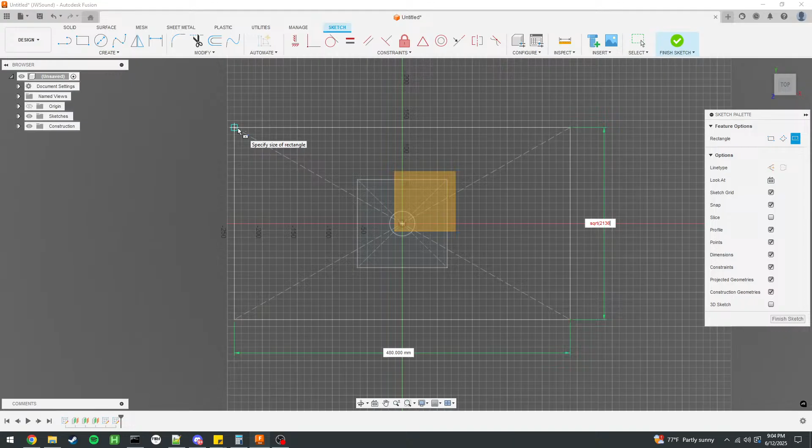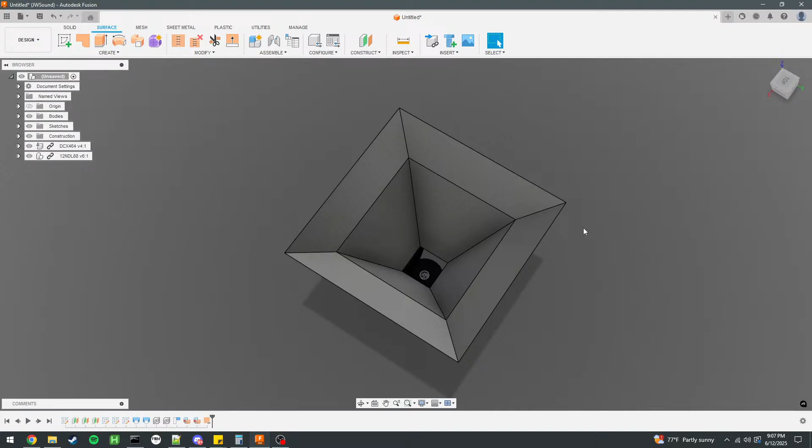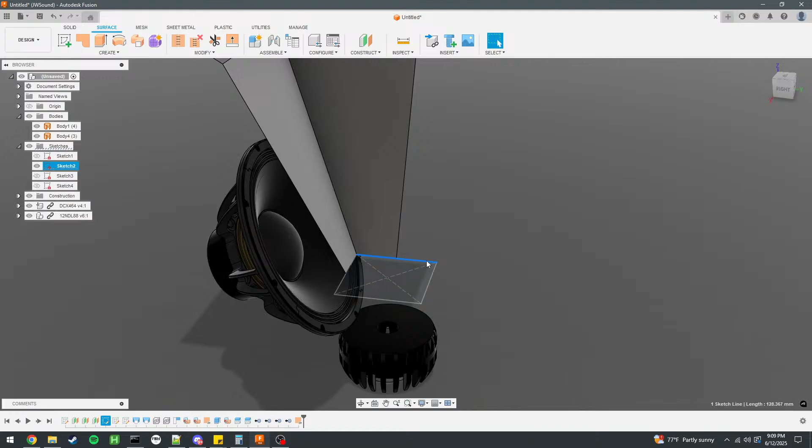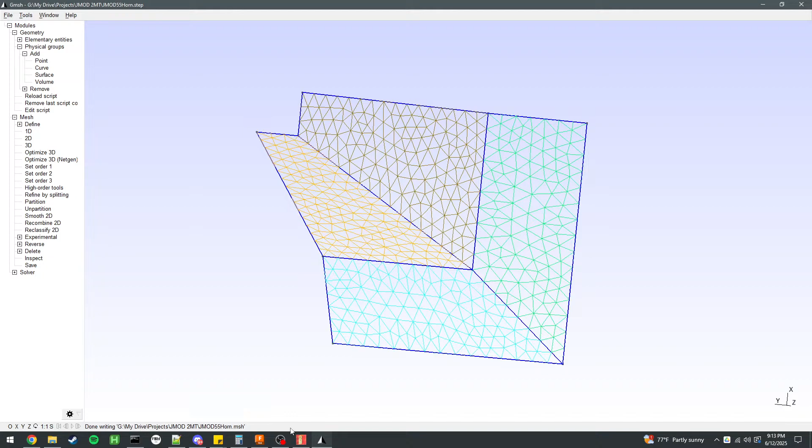Okay. Whoops, forgot this part. Where is it? There it is. There we go.

One note about this, I don't bother labeling surface groups anymore, just because it's a pain to do in Gmsh. So I normally just export all the meshes I need without actually labeling anything. I just label them as separate mesh files in here. And the next one.

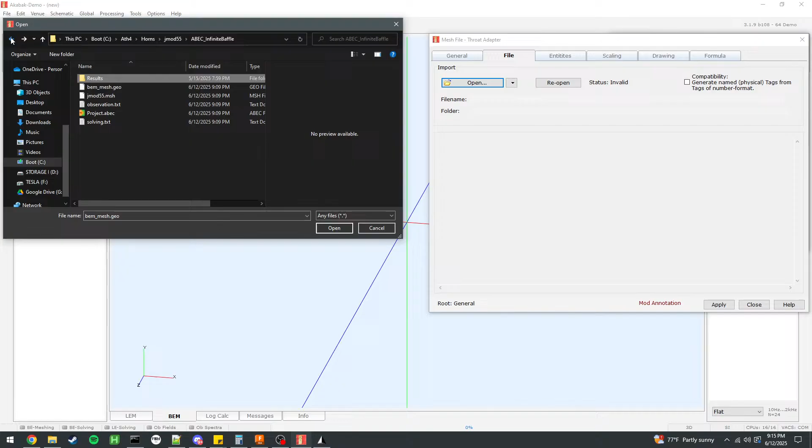Wait, there we go. Let's see. Need to add the throat adapter, which is in the ath folder. I think it's this one. Yeah. Okay, so we need the compression driver and horn type piece. Yep. And close.

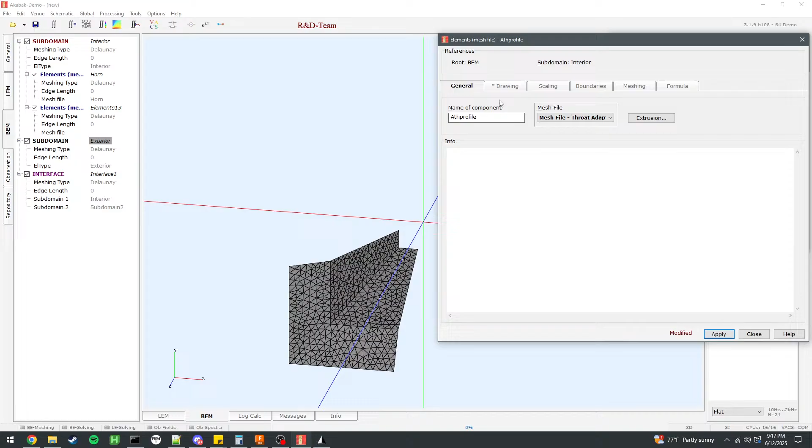Interior, exterior, and interface. I think that's it. Oops. There we go. Add the horn mesh onto this one. Yep. And yeah, the ath piece. Just call it throat adapter. Whoops. Nope, that's not right. Oh well.

Oh, oops. Get the scaling wrong. I guess it just needs to be that. Yeah, okay. And then rotate it. And not so long. The Z-axis, maybe? Yes, just 180. There we go. Nice.

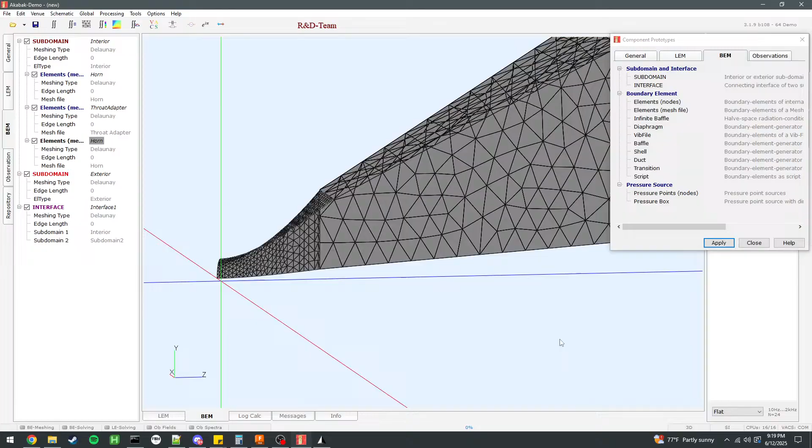And now the compression driver. I'm not going to use the full model of the DCX 464 just yet because that does add sim time. And I just want to get like a rough model in it first. And make sure that's driven. Perfect. Okay. Now we need the interface.

Wait, is that tiny again? Yes. Gotta fix the scaling. And need to rotate that 180. There we go. Now we'll actually set up the solving. And I don't expect this profile to work at all, but I do want to make sure that we get the model set up at least.

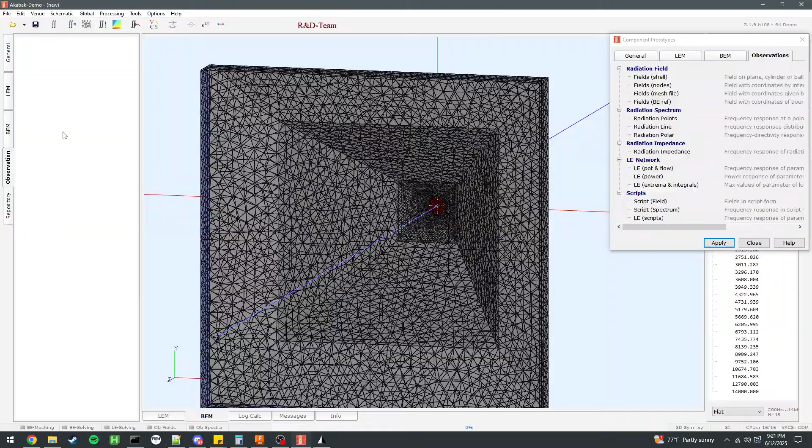All right, and now we'll set up the actual observations for what we're measuring. And this actually needs to be offset for the length of the horn, which is, what's that distance? 486 millimeters. So we go to position. That didn't do it. And neither did that. Okay, that's fine.

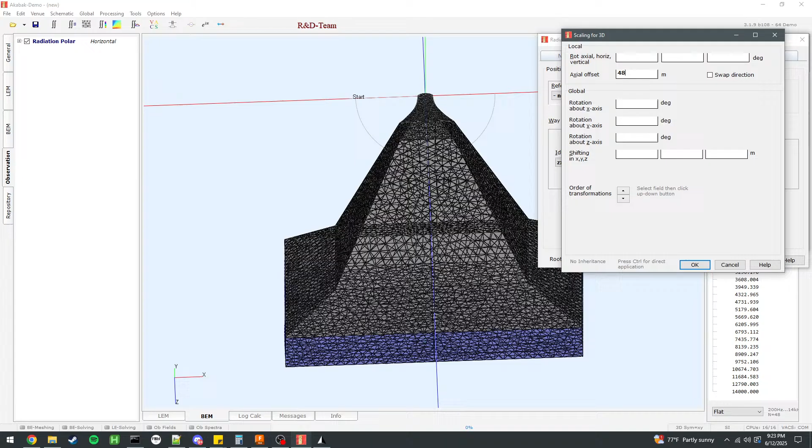Hmm. Okay, that's where it needs to be, but I need this arc to be further out. Oh, okay, it's units again, I guess. That's fine. All right, that looks all good. Yep, and close and duplicate that for the vertical. Actually, I just realized this is symmetrical. The vertical won't tell us anything different. Let's set up a 45. That might be helpful.

So I guess need to rotate like this. Yeah, okay. Yep. And let's see, fixed driving enabled. I think that's it. I always wonder if I have this set up right. Nope, forgot the infinite baffle. I can't remember if that's supposed to be interior or exterior, but we'll figure it out.

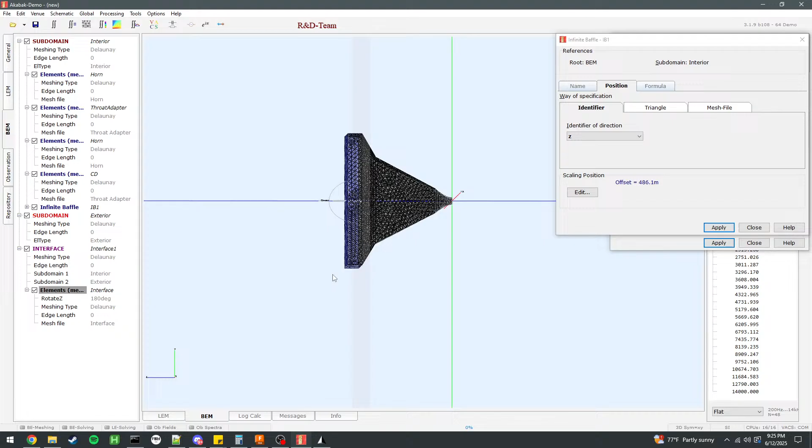Needs to be like that. And then needs to come out 486.1. There we go. Now the horn is in the wall. I think that's it. Let's see what happens. All right. And while that churns, I'm going to flip back over to here. Main goal tonight is not to get this finalized or anything, but just get the model set up. Oh, that's new. Huh. I've never seen that peak before. Guess I'll find out what that means.

But yeah, to get a kind of sort of somewhat parametric model for the setup, check fitment of things, just kind of start on the general layout of how this build's going to go together. So we'll actually start modeling the horn a bit, and then we can always come back to this point in the timeline to get what we need out of it if we need to regenerate those meshes. Let's see. So I guess the first thing is figuring out how the trapezoid part's going to work and what angle that needs to be at.

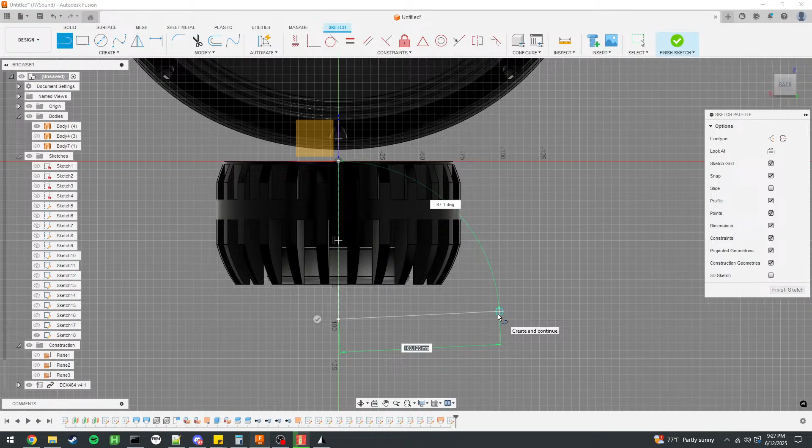I'm going to actually look at it like this. So let's get the back of the cabinet. That's 80. Yeah, probably like 100's fine for clearance to the compression driver. And then the next important part is figuring out how far that needs to extend. So that's 112.6. I think what we need it to be is that. Yeah, I might have to think about that a little more. Well, let's see if this is, yeah, because I want to make sure there's room for the compression driver in the back.

So that's the thing that I'm wondering here: if I can't get that angle exactly 55 degrees, what does it really need to be? Because in theory, you want a bit of overlap between the two, but not too much. Because you can either have an instance where the patterns of the two speakers that are going to be coupled together will destructively cause comb filtering, or you're just going to end up with a null in the middle.

So we kind of want to ride right between that line. And the directivity is supposed to be 55 degrees. So we have to figure out, does this need to be 57 degrees? Does it need to be 52 degrees or any variation like that? My gut kind of says it needs to be a little bit closer in, but that's why we're doing

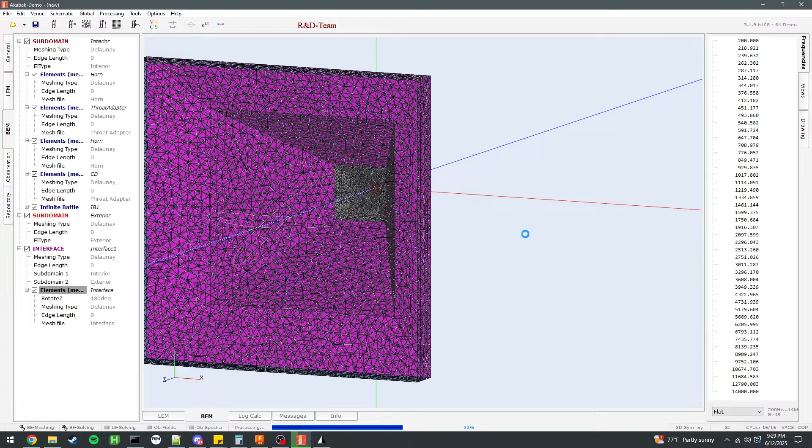this part. So really what I would like to do is figure out a way to get this model set up with two cabinets. I wanted to get at least one good sim result first, but the idea is we can actually set two up at an angle and then slowly adjust that angle between them and use both driving elements to figure out what that pattern looks like in theory. I've not done this yet in Akabak, so it may or may not work.

The pink mesh is very interesting though. Let me see what I did in the draft one. There we go. So with this one, that's 109.6. So that's 19.6 times 2. Let's see here. Yeah, that's something like that, which might be fine.

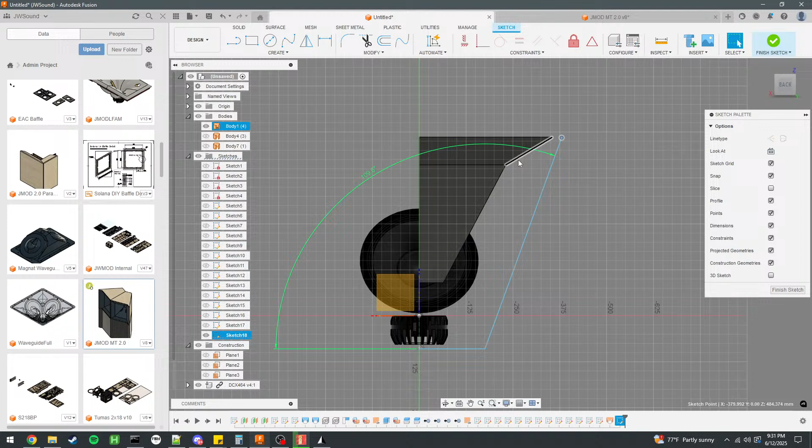I guess one variable I have to tweak here is the length of that secondary flare piece, because if you think about driver access and how this has all got to fit together, if I move that in or out, I can move the outside edge of that cabinet and adjust the angle pretty easily while still having room to access drivers. So I might actually have to move it in considerably. Again, it kind of depends on how this shakes out here.

Because really I'm trying to figure out what the angle of the outside edge of the cabinet should be, and then that'll drive a lot of decisions around how I'm going to fit the drivers in there, which I don't feel like is going to be a challenge. These are like 28-inch or 700 millimeter wide mounts, and using the 12s in there, I can push them up if I need to, but there should be plenty of room inside this cabinet. There you go. Okay.

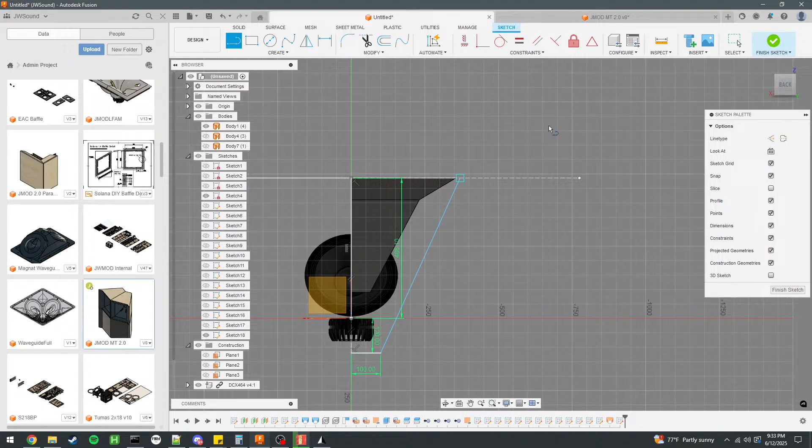Yeah, so I'm just going to roughly sketch this out and know that I'll come back and change that to what it needs to be later. So that's 711. We'll go and set that, then add. I guess half inch. That's another thing. This cabinet's a little bit larger, so it might make more sense to use 18 millimeter plywood throughout, but I kind of want to see what it looks like with half inch.

All right, and oops. No, I need you to go there. There you go. Okay. Yeah, like that. Okay, this is not filled in because of that. There we go. Yeah, in theory, this all kind of fits together.

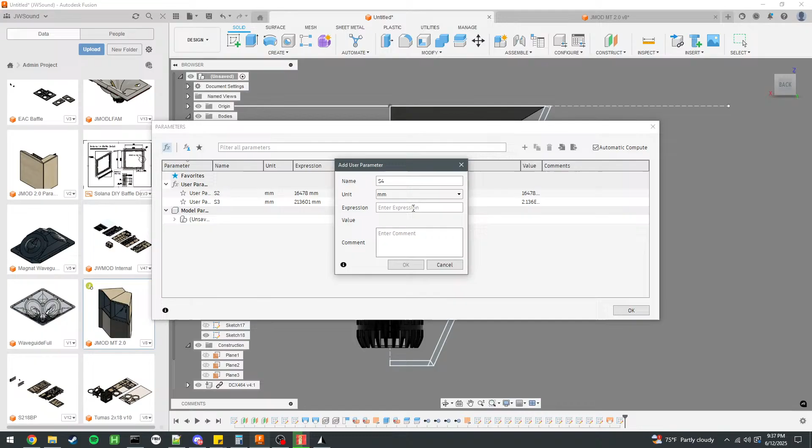So we'll do the S2 from Hornresp, and that needs to be 16478. S3. And S4. All right, so I did that so that I can go into the actual sketches here and replace these values. Oh, shoot. That's not right. Okay, why don't you like this? Maybe I need to actually remove the units. Oh, yeah, of course that works.

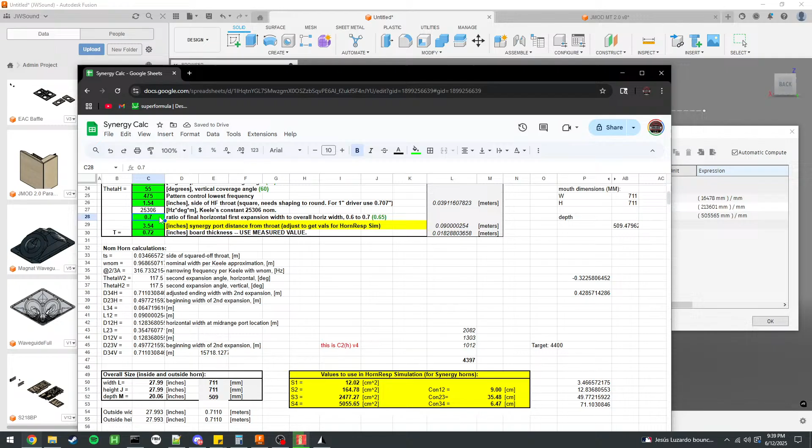Yep, and the sketch. Cool. So what that allows me to do now is if I need to change the angle of this outer wall, which I definitely will, all I have to do is flip back over to the Synergy Calc spreadsheet, which I'm still working on automating, and then change, I believe, this value, maybe? No, that's not right. Might actually be better to just eyeball it. So instead of 55, I go like 45. Yeah, okay, cool. So that's doing the thing.

And this is something where I can go into Akabak and actually simulate what that does, just like I did with version 2 of the wide variant. But yeah, that looks like it should. I do want to make it so the sketch actually moves too. That math is it this? Yeah, it's that. Okay, sick. So now I change this value. Perfect. Cool.

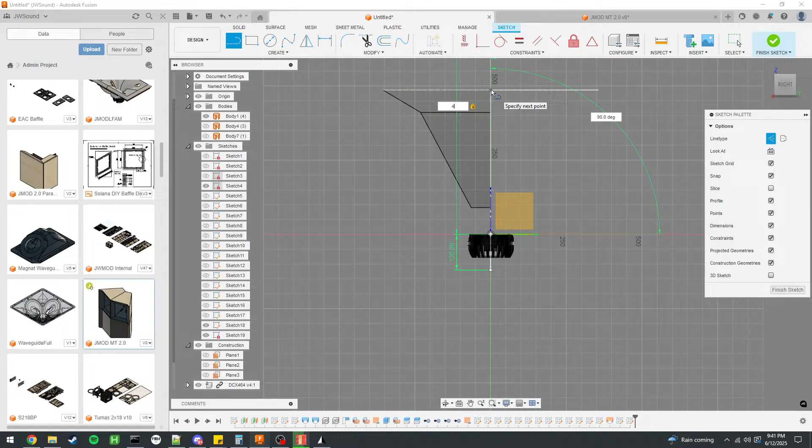Okay. Now I think I want to do this axis, which is going to be a lot easier because all we have to do is do that. Wait, I think I messed up. All right, just need to think about how this is set up. I guess that's right.

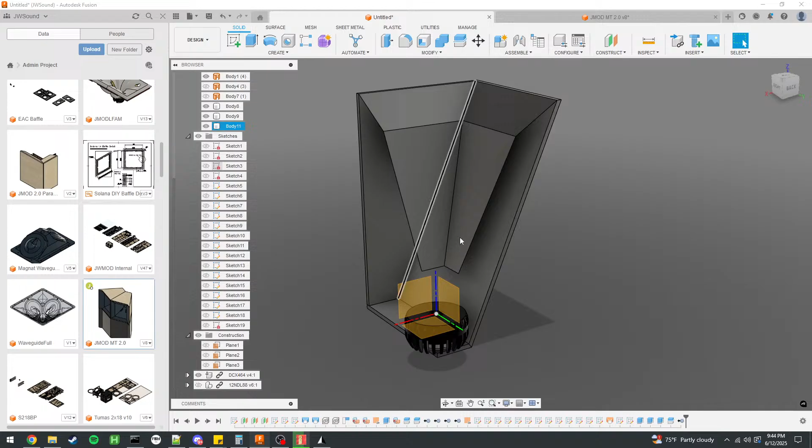Okay. What next? Driver's fit. Yeah, that's like perfect. There's like a lot of extra volume in here. It's like, could I fit 15s? Probably. It's a bit excessive though. Have to think about that. Anyways, as far as getting this in here, that can go like that. That can go like that, I think. Yeah, yep, okay.

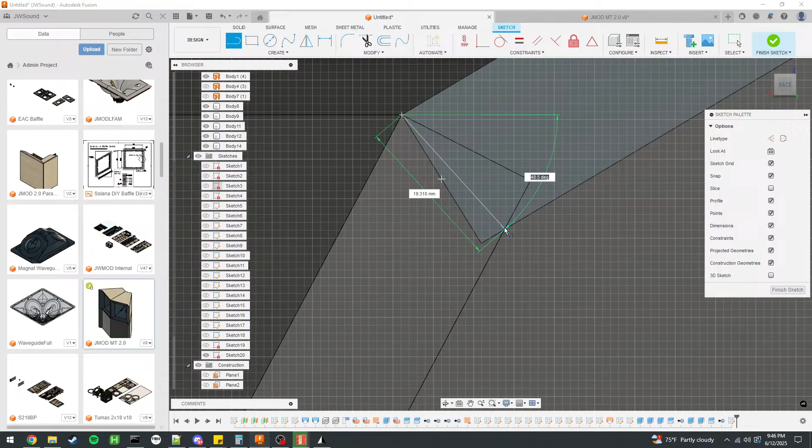I think what we need to do here, oh wait, that's gonna be tricky. I think the easy way to do this is first split it, remove that. That's gonna be a really tricky angle to cut. Maybe not terrible. Yeah, 34 isn't crazy on a table saw. It's just annoying. And then for that bottom part there, trying to think what that angle would actually be. So that's 18.3.

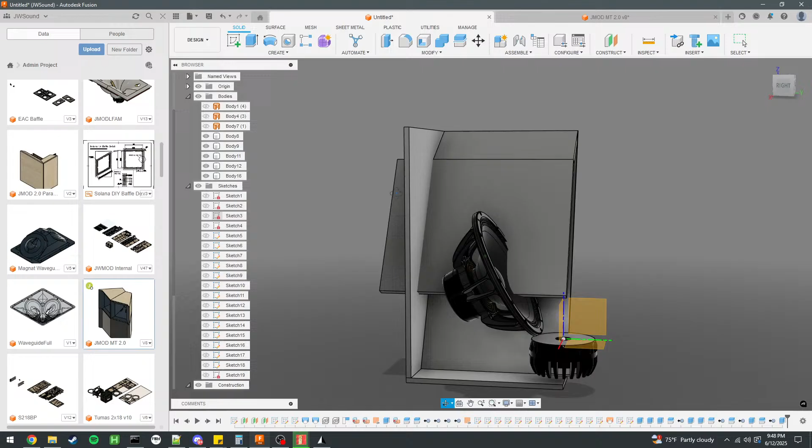I'd rather write a formula in here for figuring out what that angle is rather than just sticking a value in there. Actually, it may not matter. Yeah, I can just do this. And then you go away. And then cool. I think same for this one. Oops, there we go. Oh, wait. I totally put that on the wrong flare. Whoops. Yeah, okay. All these steps need to go away. Okay, that's fine. You come out 18. You come out 18.

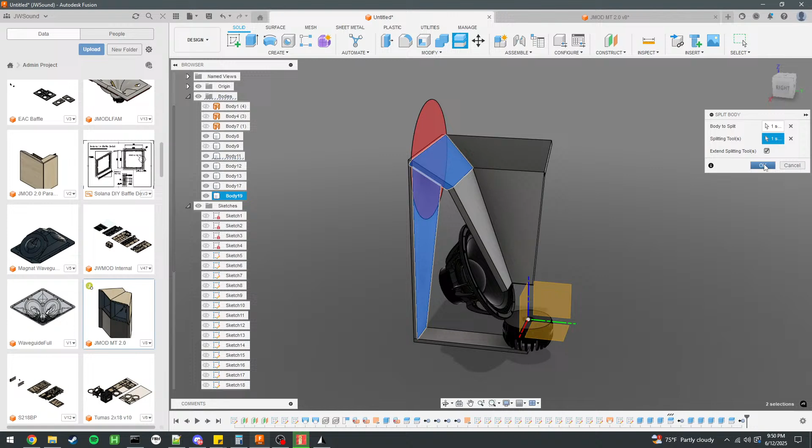There we go. What we want for these panels is for them to extend out to here, so that they're basically supported by the exterior walls. I'm pretty sure this doesn't work. No. Okay. So repeat what we did earlier. Move that and split that one. Yep.

Yeah, I use millimeters because it was just easier to switch over. I tried to work in inches, but most of the people who use my design are not in the US, so I just figured it was easier to switch.

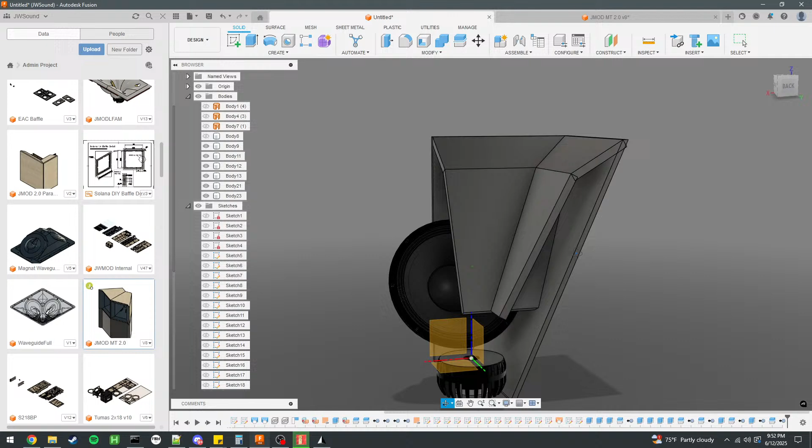Okay, so got this now. We want to extend these out like so. And same for this one. Wait. Okay. I mean, I did that wrong, but I guess it doesn't matter. Okay, split this like that and remove. Cool. So this part's a little bit tricky. I can already tell. Maybe not. It's just getting these pockets cut here.

So because this panel kind of intersects at an angle here, it's not 90. It's more like 10.8 degrees, or sorry, 79. It could make things a little bit tricky for assembly. I mean, I can just cut that pocket bigger on the CNC, but since that's not a perfect 90, I'm just gonna have to see how all this is gonna fit together to make sure that's actually doable. Wait, would it be a perfect 90? No, I don't think so. Okay, well, that's fine.

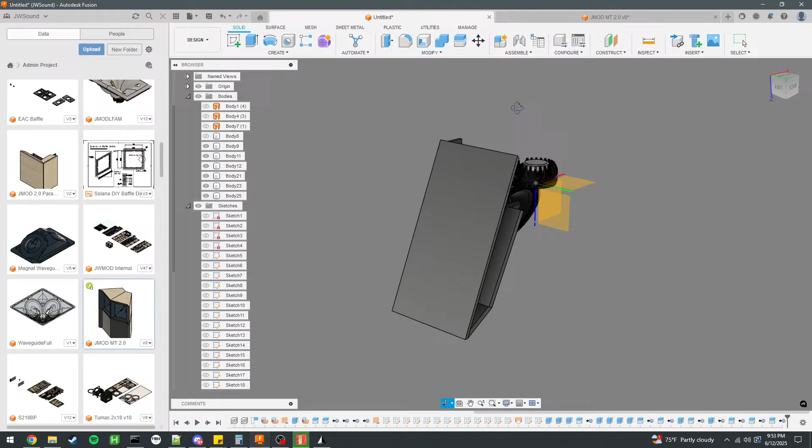Okay, so this panel looks good. Do actually need to split it up here. Cool. Yeah, that's looking actually pretty decent, I feel like. I want to rough out where the ports are going to be. So to do that, it's easiest to make a circle that's going to be your quarter wavelength. And I'm hopeless because I always use this calculator. So we know it's going to have to be 500 hertz, 686. Divide that by 4. Whoa, is that right? That feels really close. Hang on.

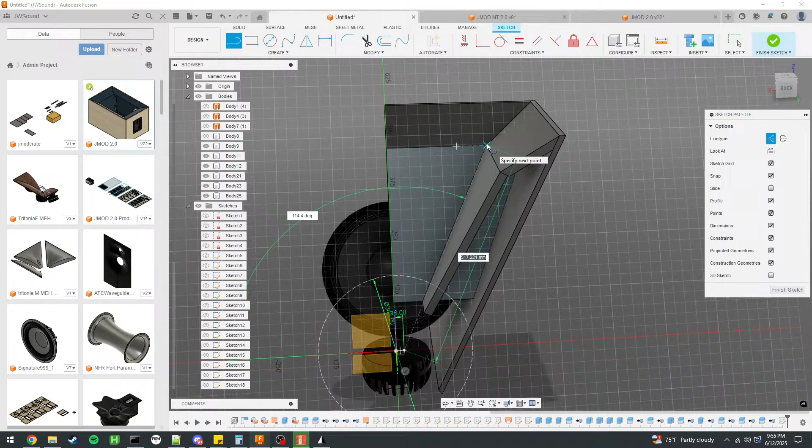You actually see what I did in here. Okay, so for this design, I used a circle with a radius of 343. Oh, yeah, because that's radius, not diameter. Okay, so back to here. That needs to be that. Okay, cool. That's where the center of the ports need to be, roughly. Usually it's easiest to just come out here. Actually, that needs to be that. Sure, we'll put it there. And then whatever the actual port area for this was is probably what I need to reuse, which is just roughly 3813. So that's kind of my target.

Actually, I did something different on these, didn't I? It may actually be way, way easier just to copy this whole sketch, because the actual acoustic crossovers aren't going to be anything different with this. There we go.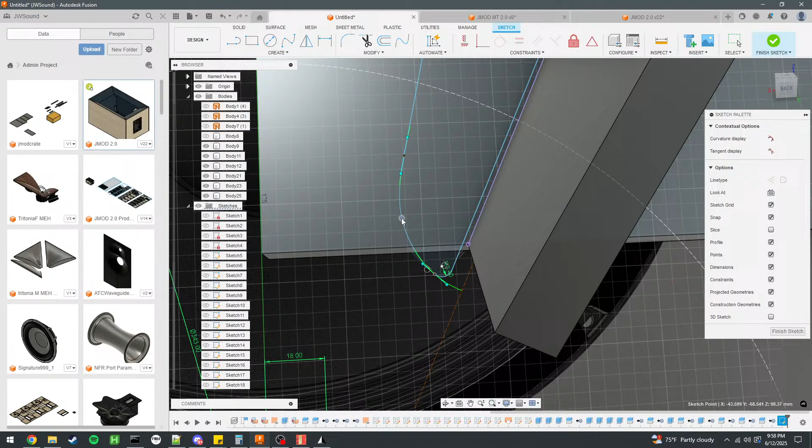Yeah, there we go. Actually, given where that line is, where the throat adapter terminates, I'm kind of wondering if I even need to do this kind of extension part into the actual throat adapter or not. Of course, I think the logic there is I wanted to get the ports in as close as possible for maximum summation. So

it's a little bit of a balancing act because with the wide coverage top, you have a lot faster of a flare rate. So by the time the wavefront gets to the taps, they're a relatively small part of the horn. Whereas with this one being a 55 by 55 coverage pattern, the horn is going to have much less of a flare rate, meaning the taps are going to take up more space.

So as long as the middle of them is roughly where that line is, we should get ideal summation. So I probably can push them out a bit to prevent any interruptions to the compression driver wavefront, or mitigate that somewhat. So maybe something like this. But at that point, the middle of the port's well outside a quarter wavelength, and we're more like,

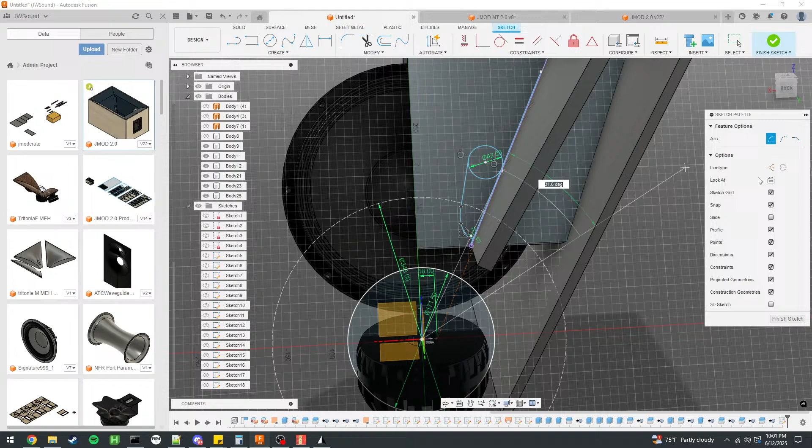actually, there's an easier way to do this. Okay, that's kind of like the third wavelength, which some people are saying is okay, which it should be. It still puts the sources in the summation range, but yeah, maybe it's worth a shot trying. I'm just gonna leave it right there for now and see how it looks.

And then the surface area, our target was, hang on, I forgot the number. Need roughly 3,800. I'm gonna write that down. Okay, so we're at 3,500, so we can actually go a bit smaller. I think I'm gonna make this a little bit smaller then.

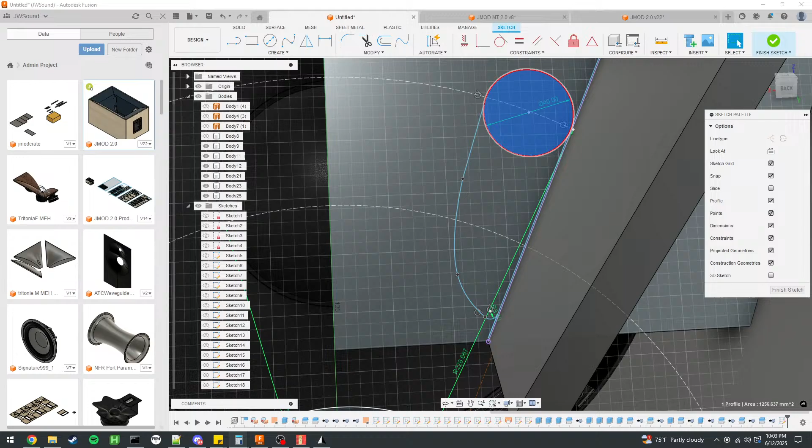We should try 40. Okay, that's 1256 and 2287, 3500, just a little bit more. I could bring it down a little bit closer to this edge. I don't want to bring it too close, because if I bring it closer than 5 mils, that piece is gonna tear out when the CNC tries to cut it.

So maybe we can just ease that in a bit more, bring this up, see if that gets us there. Yeah, it's like 3700. It's close enough. That should actually work. Something a bit like that. Now, on the bass reflex port side, also, is that too small? It's like 5 mils. That should be fine. I might go back and change that though, or tweak it a bit.

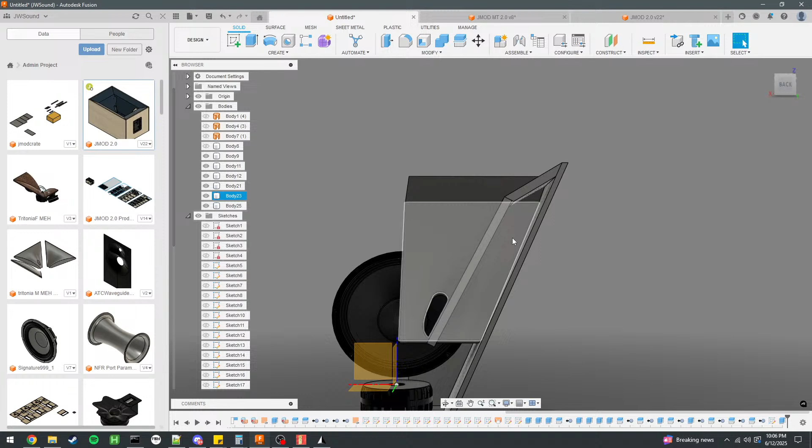So the bass reflex ports, normally I like to put them on this panel, down here, but I'm just trying to think about how this internal chamber is going to work. Because if I put them way down in here, they're not really a part of the larger enclosure. They're kind of in their own pocket down here. And this long, skinny section might act as a resonator in some ways, which I don't want, because then it's some kind of weird horn.

So I have enough room on this where I could put them on the same panel. That probably actually wouldn't be a bad idea. I want to mock that up and see how it looks. And I'll just reuse the same ports I had here. Makes it really easy. Okay, grab that. Actually needs to be mirrored. Okay, can I do that? Apparently I can. Okay.

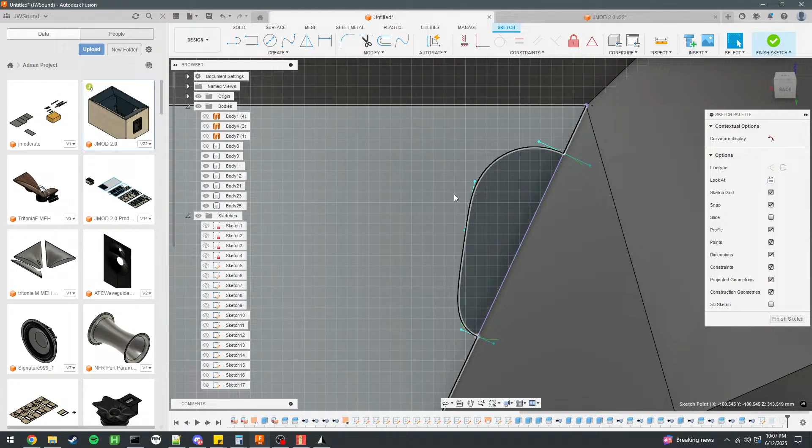Just realized it makes more sense for me to just use that same sketch here for this. Why would I create a separate one? The size of this port will need to change because the internal volume of this cabinet's different, but I'm not going to worry about that just yet. Just trying to get the placeholders where they need to be. That sketch can go away. Maybe something a bit like that. It looks pretty weird. I want to see how it actually looks mirrored though.

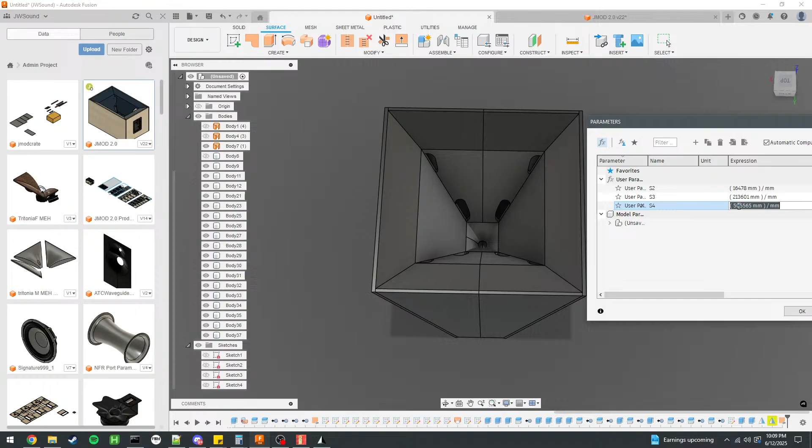Okay. Yeah, I mean, it's not like terrible. This thing's going to be pretty heavy though. I'm also curious, like, if I change the parameters now, does everything work like it should? Wow, it actually did. I'm surprised. Wonder if this one will. Okay, yeah, that one breaks things. Won't do that then.

Do I think it'll be movable alone? Maybe. Yeah, I think if I'm able to get these sides made out of 12 millimeter plywood instead of 18, it's probably going to be right at, I want to say, maybe 85 pounds, because the wide coverage version is 75. Oops. And that's 750 by 470. And this one is 800 by 800, I guess. I don't know. That might be getting on the heavier side,

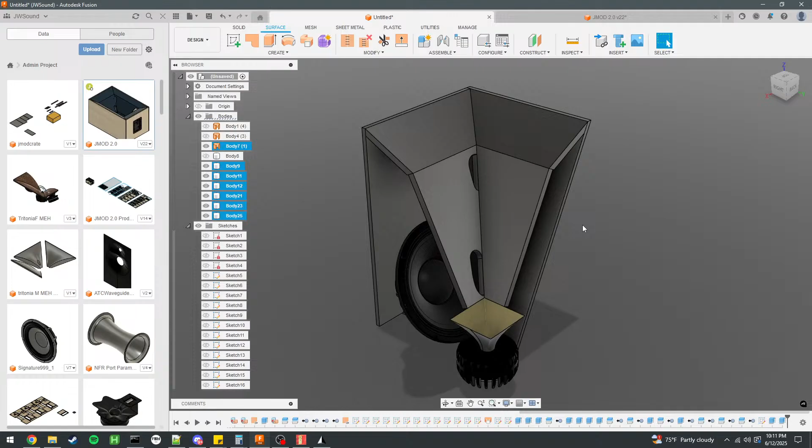Yeah, I mean you could put these on a pole if you wanted to do singles, and you definitely could run them and get the nice 55 by 55 pattern. But one of the things I want to do is really make this for arraying. So to be able to be ran in pairs of two per side to cover larger crowds, like 500 to 1,000 people. Because this design, as much as I love it, is meant more for portability. So you won't necessarily be able to cover the larger crowds with the original JMOD.

Anyways, Akabak finished. Nope. See if it actually made anything. This step usually doesn't take anywhere near this long, so I have a suspicion that it's not going to give me good results because something's glitched.

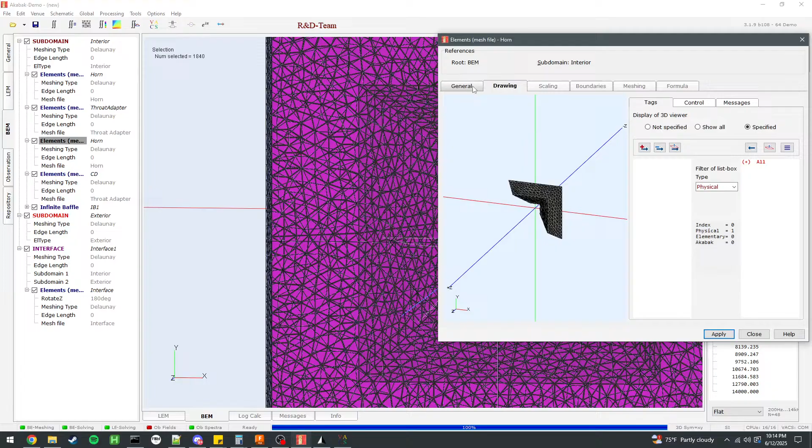Yeah, yeah, okay. That's, yep, looks cool, but pretty meaningless. Okay, so something is wrong with the model. And I suspect it's the horn part, although I'm not really sure what. I mean, it looks fine. Yeah, I might just come back to this later. Okay,

so we're at the ports. I feel good enough with them where they are as placeholders to leave them. Kind of want to look at the rear panel now. Actually, just driver access in general. So there's kind of two ways you can do driver access with a horn like this. One, you can have this whole flare section removable, which I'm not crazy about because it makes the front look not as good.

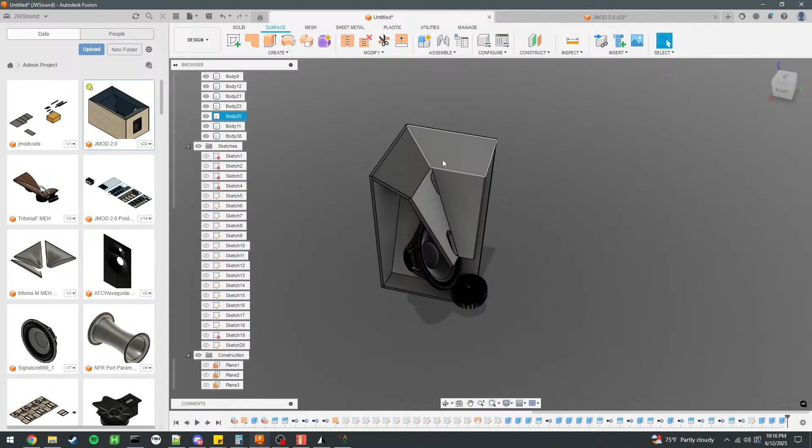The other way is hatches, which I'll probably do instead. So ideally, the fewer hatches I can get away with, the better. But we need to get both 12s in and the compression driver. Maybe a rear hatch is usable for the compression driver. Yeah, that's definitely important. I'm also kind of looking if I can do this access hatch on this big flat panel here, it does make things a bit easier.

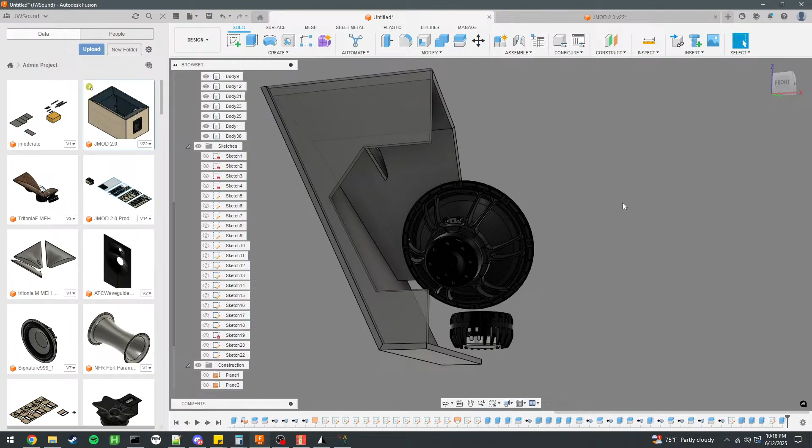So maybe like this. Yeah, maybe something like that. Because at least this allows pretty easy bolt access, and you'd just be able to lay the cabinet on this flat end and access the driver from the top. Plus the, I guess, hexagon shape is pretty cool. All right. So let's assume we give that.

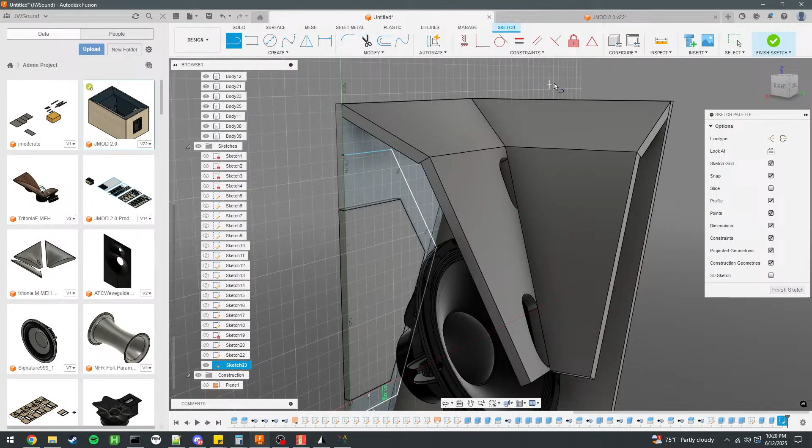And then we need an actual frame in here. Yeah, I might need to think about this a little bit. Okay, so we could do something a bit like that. Yeah, just kind of roughing it out. And then probably M6 fasteners holding it there. So assuming I do that, these need to come in like 15, maybe like 18. Sure.

Okay. So the access panel is a bit like this. And that should fit the driver through it. But I can actually check since I have a high quality model. So it goes in. Oh yeah, that's like too much room.

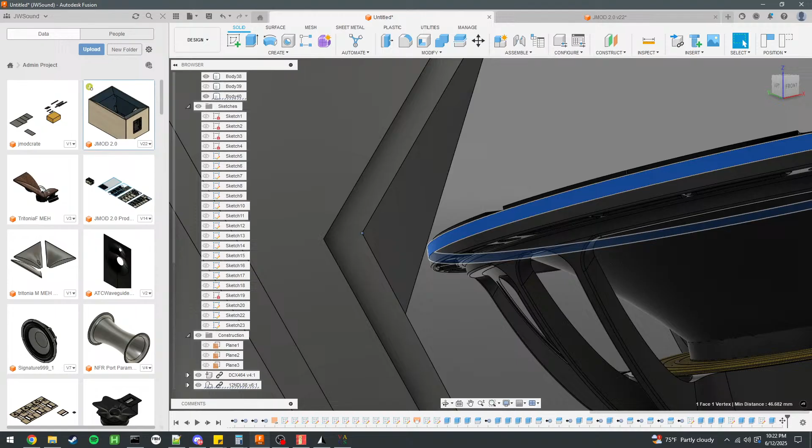Ah, a little scary. Okay, so yeah, I can make this access hatch a good bit smaller. Actually, got an idea. Cool. Yeah, this is why I like Fusion. And okay, yeah, this line actually needs to be parallel.

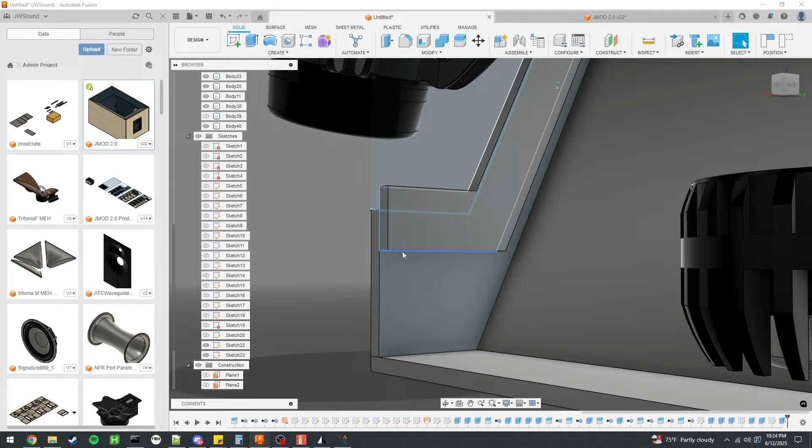So same idea with this one. Want to make sure the drivers are easily accessed. I don't remember how to actually return this to its position. Okay, but in general, kind of like the shape of this. I think I'm going to change just a couple things real quick. Extend that out a bit.

What this doesn't give you good access to, though, is the compression driver, because I don't think you could reach your arm through that hole to get back to here very easily. That would just be a pain. Because, assuming the 12 isn't installed, you've still got a whole mounting flange that you can't see here, and this would actually be upside down. So maybe look for a better compression driver mounting solution, or not mounting solution, but access.

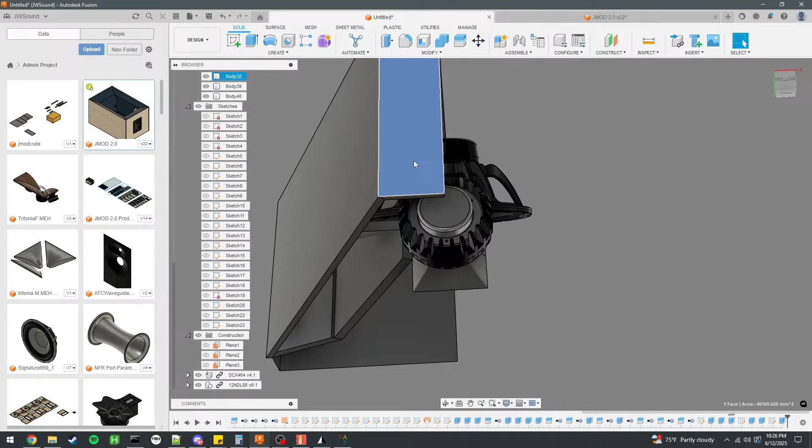I'm kind of wondering if you could always slide the driver in sideways and then rotate it in there, which means if I did do a kind of rear hatch here, I could make it a bit smaller. And what I could even do is, for that rear access hatch, mount the Speakons on it. I don't know if that's a nice to have so that those are removable, but maybe.

All right, let's see what we got. So, the hope is that you're not replacing drivers all the time. And if you are, you might need to check your limiters, but it shouldn't be painful to assemble. That's just not fun.

As far as making the whole horn removable, it's just aesthetics. I don't like the look of the hardware you need, the gaskets you need. There's an extra lip. I just generally like the look of this clean termination where you have the horn and then the exterior walls, and there's no gap or step or ledge or exposed fasteners. But the other way of having the horn removable is totally viable.

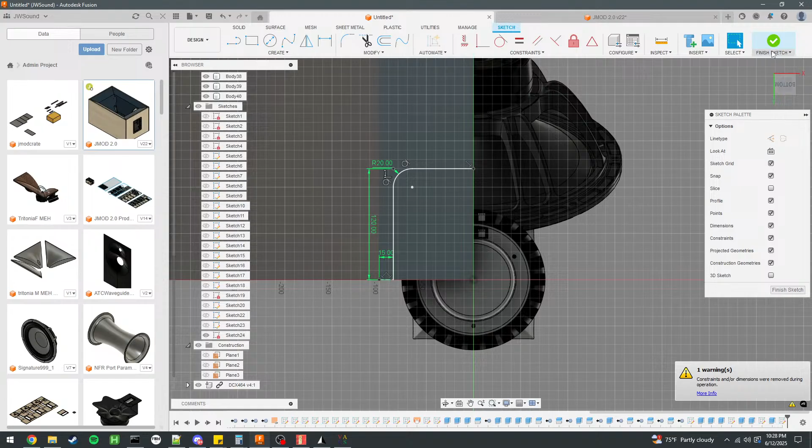All right, so I'm gonna say maybe 100. 120. Yeah. And then this would get rounded. Sure. And these can probably be M5 bolts since this is a smaller panel. Maybe not. I can experiment with that. That should be enough of a lip to get a gasket seal on.

The thing I don't love is that's not a lot to glue onto. But again, it's kind of a small panel, so it might not be a huge issue. So we'll extend that out a bit. Go like 180 maybe. Oops. There we go. Okay. Yeah, something a bit like that.

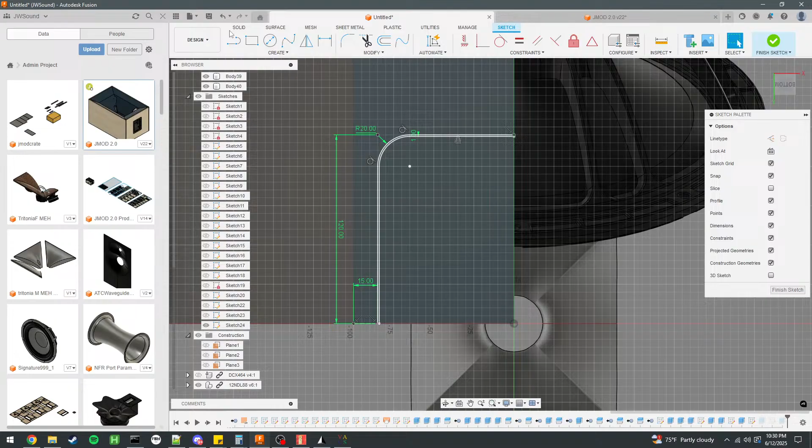I'm even going to go ahead and model the bolt holes for these. So assuming we have 18 millimeters to work with, 9 millimeters in. Actually, let me just do this. Yeah. Maybe something a bit like that.

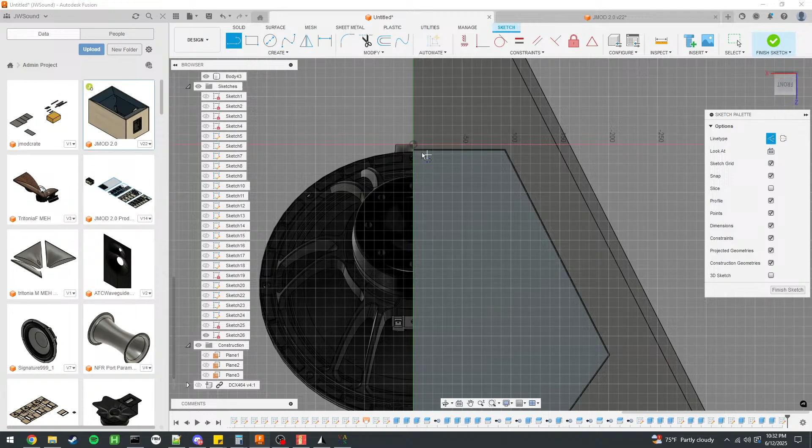Okay, since this is a weird shape, I'm gonna try a different way of making these holes. Okay, there's supposed to be a pattern along path option here. I don't know what happened to it. Maybe it goes like this. Okay, it does go like that.

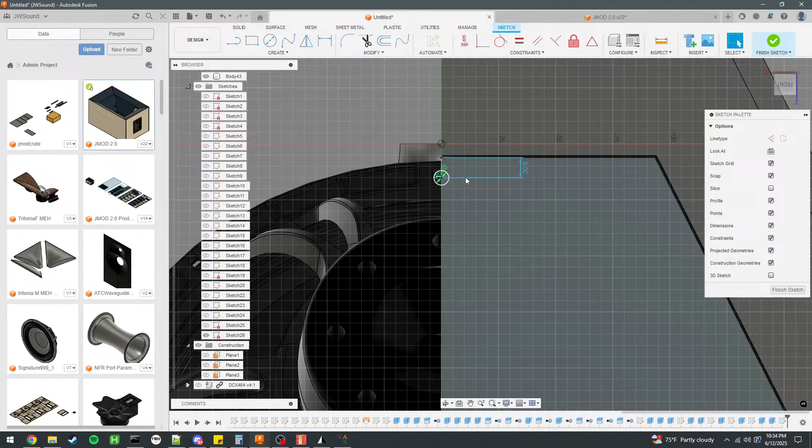There we go. I also just realized these are half circles. That's annoying. Okay. Yeah, see, I thought there was a pattern option in the sketch, but I'm not seeing it. Google might be of help. Oh, there is no pattern on path for sketches. Okay, so there's just not. All right, that's fine. I'll just make the whole panel.

I like to save mirroring until the later steps just because it makes everything easier if you just model like a half or a quarter of the thing and then just mirror it later. But sometimes you just have parts you can't avoid like this. I don't need that anymore. So we'll go out 9 millimeters again. Oh, I'm gonna need to mirror that part too. There we go.

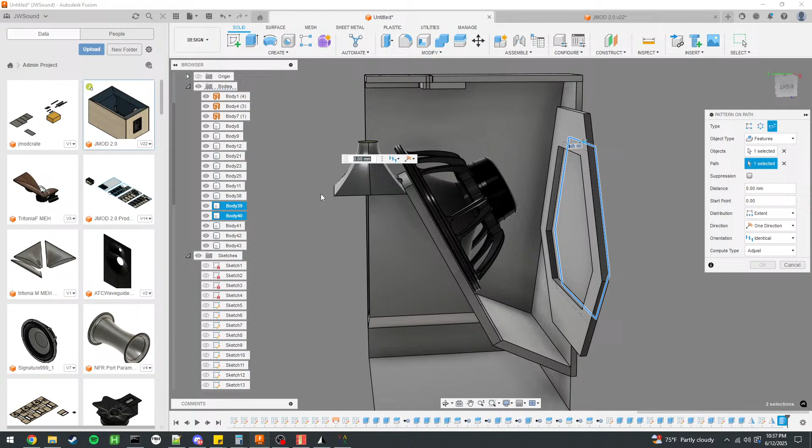Okay. The model for the DCX I made just because I got tired of not having it. The model for the 12NDL88 is from B&C, and that's why it's such a nice model. Okay, so path direction. Probably like 12 of these. And then can't remember how you actually get these even. There is a way to do it.

Yeah, it's definitely fun just to kind of build models like that. One of my neighbors has a really nice 3D scanner, so I'll take that sometimes and scan the more rare or interesting drivers. So I just have 3D models of those too.

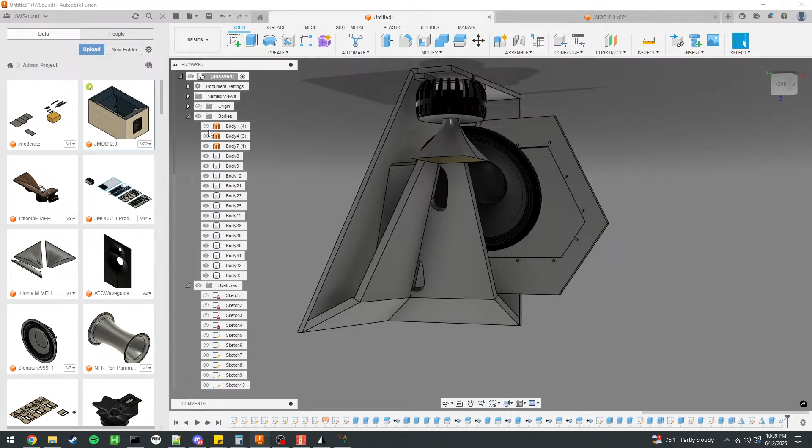All right, maybe I can go. So that definitely needs to be 12, but oh, maybe that's how you do it. Okay, now they're actually even. So 3, 4, 5, 6, 7, 8, 9, 10, 11. Okay, now that's 12. That hurt my brain a little bit, but I think that's how it should be. Yeah, okay, that looks right. And somehow this messed up. Or no, I just had something hidden that shouldn't have been. Okay.

Trying to think what next would be important to check. Probably the rebates is a good thing to start looking at, seeing how bad it is, because I have no idea how this is going to work. Actually, okay, I just wasn't thinking about it right, because apparently that is a 90-degree rebate. For whatever reason, I thought that panel would have to fit in it at an angle, but that doesn't actually look to be the case, which is great. Okay.

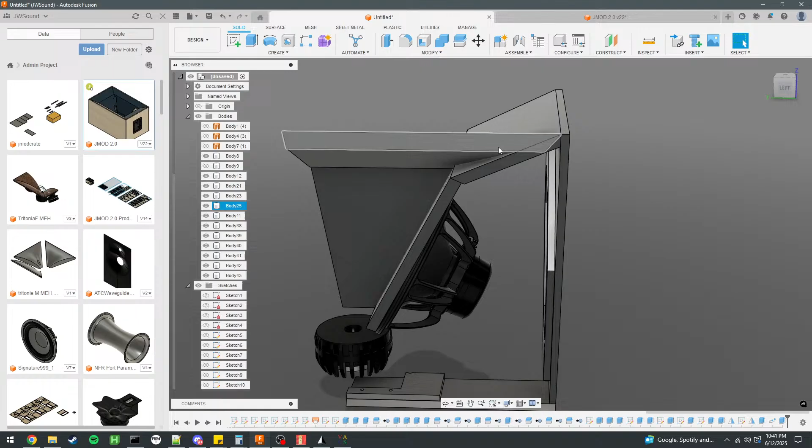So for dog bones, I know some people do that in the CAM part. I know some people have a plugin that does it. I just make a sketch for it, honestly. I don't know if there's a right way to do it, but that's the way I've found is just fastest for me. Okay, so for this part, I want to do that. And then same for this.

So this panel is a little bit funky. If you look in the new JMOD plan, it's the same here, where basically you have this little lip here, and what that means is, okay, you can't cut this on a table saw, so the CNC has to cut this bevel, but it means that these inner flares can have just very simple 90-degree edges there and there, which just makes things simpler. So it's a little bit of a trade-off, but I think it's worth it because the CNC can cut that no problem.

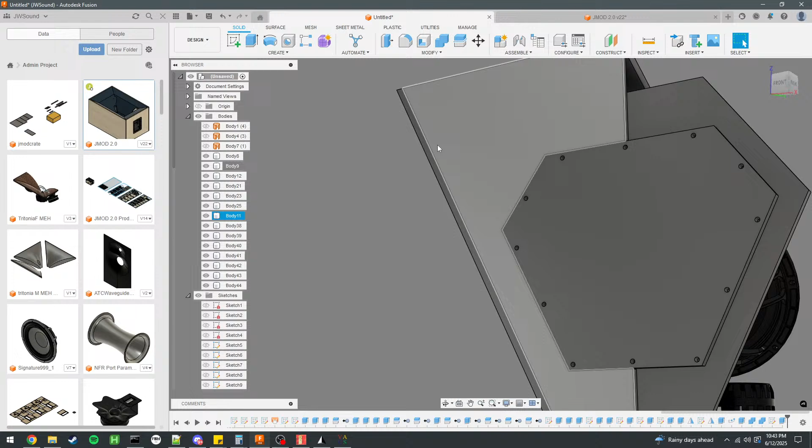Okay. So for this, bring that out about 30. Maybe more like 50. Yeah. And we cut into the bottom part here. Cool. And we'll do the same for this. Oh. Okay. Sure. Just pretend that didn't happen. Cool.

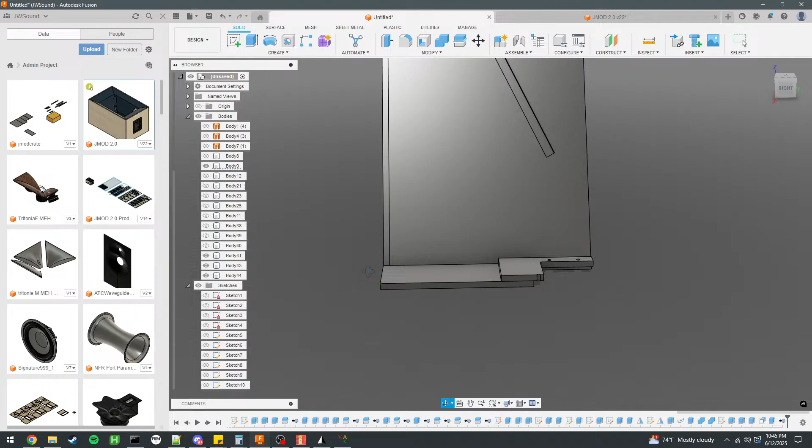Okay. This is the part where it starts to get a little bit confusing, but I think it's starting to come together. Okay, somehow we have a duplicate body here. Okay, guess I can remove that. All right. That looks good. That could be an annoying crevice there. It also might be just something where I put filler in because that's like what, 5 millimeters across.

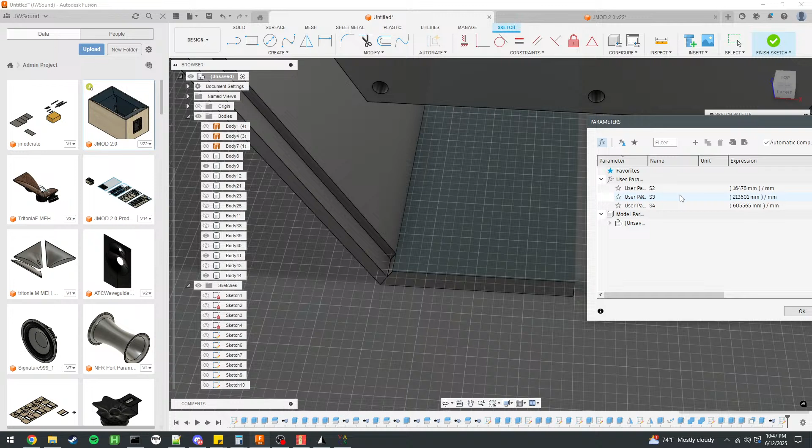Hmm. Actually, what am I talking about? I can just do this. There we go. Okay, so this panel comes down 5 and cuts into the rear panel. Oh, yeah, no, that's not quite it. Okay, I'm just going to use a sketch. And before I get any further, I'm going to go ahead and add in my variable, or just call it glue gap, which is 0.6 on my CNC.

And there we go. And I think we can just pull that down 5. Yeah.

Yeah, so the glue gap is just to help the pieces fit together. So technically I buy 12 millimeter or half-inch plywood, but it can come in a little thick. Actually, it usually comes in a little thick. So I'm not sure if that's something where maybe the CNC cuts things too wide or too narrow. But either way, you want a little bit of play for the actual panels to slide into, because if that's a zero tolerance, they won't fit. And then like you said too, the glue can fill in that gap there.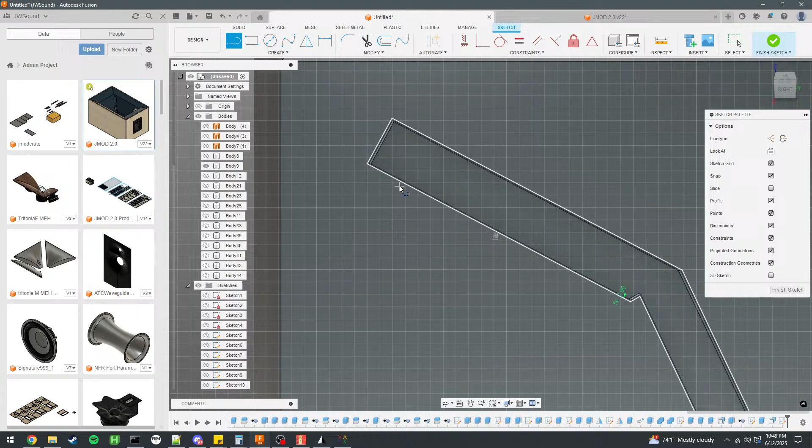Okay. So now I can actually go back to isolating this and fix these rebates. Okay. When I add dog bones, I usually just create a circle sketch and then drag it up to the corner where it needs to be. And then for this part, it's just going to be easier to kind of bridge that.

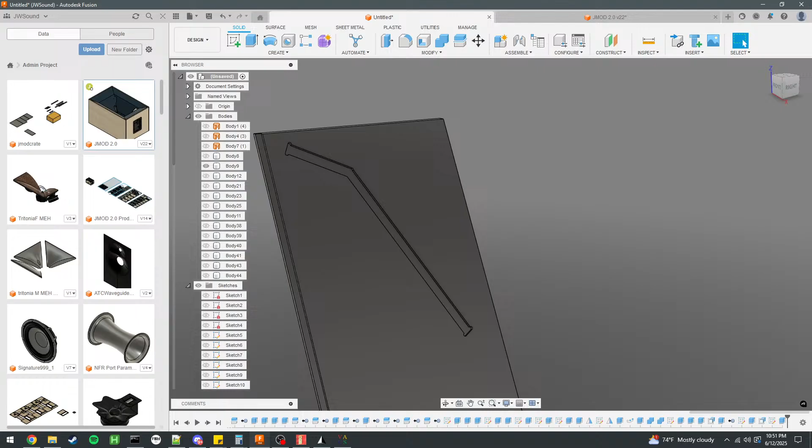Whoops. And I think that's it. Okay. I'm gonna actually label these now because I'm forgetting what's what. So this will be, I'm looking at it from the top. Yep, okay.

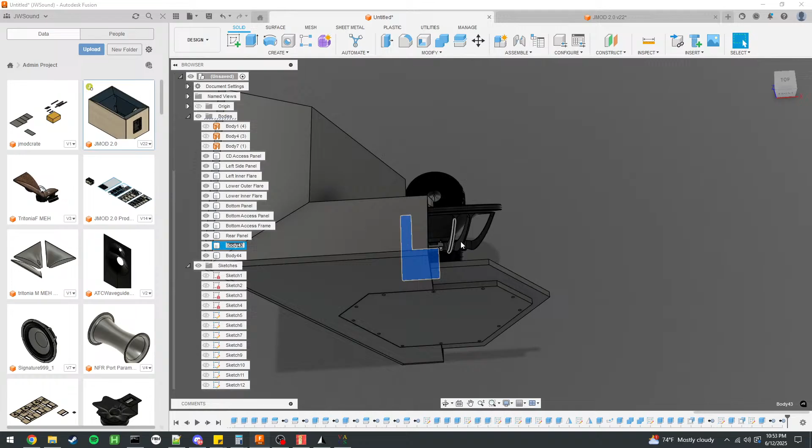Oh, okay. Don't know what that body is. Gonna remove it. Okay, somehow that's another duplicate. Okay. And that should be it.

So I'm trying to think of what kind of bracing would be needed. So I'm just going to go ahead and mirror the full model then, and then kind of figure out what might be weak points in the model.

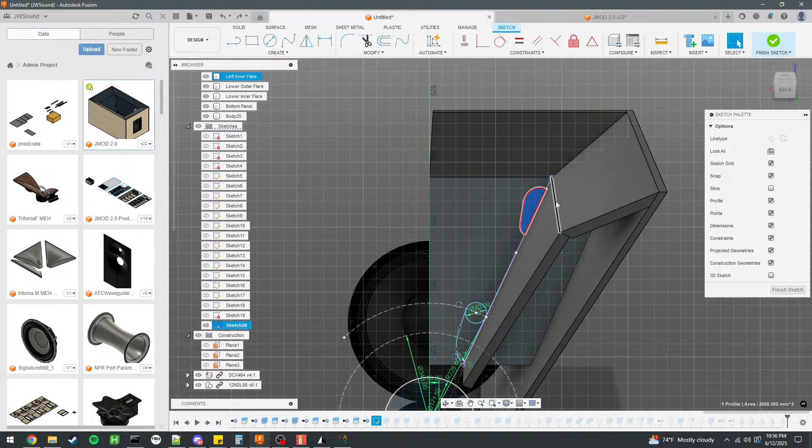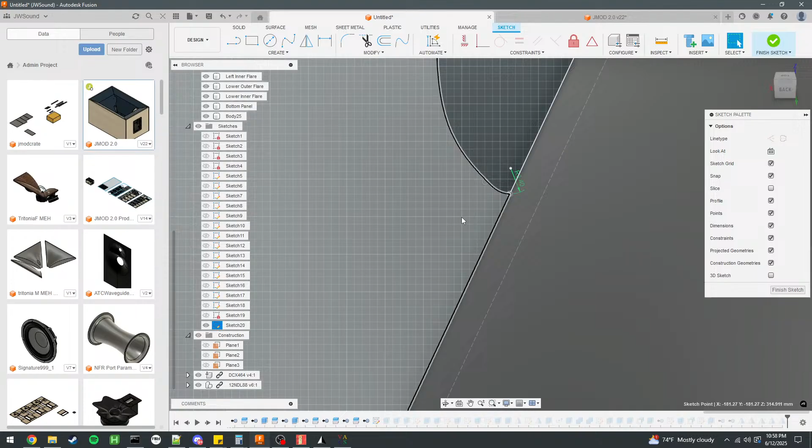Okay, so actually I need the area from that. 2000. Oh, that broke everything. How did that happen? Okay, yeah, I need better sketch objects than this because this is a pain. Here we go. Wow. Okay, here we go. Where was that extrude? Cool.

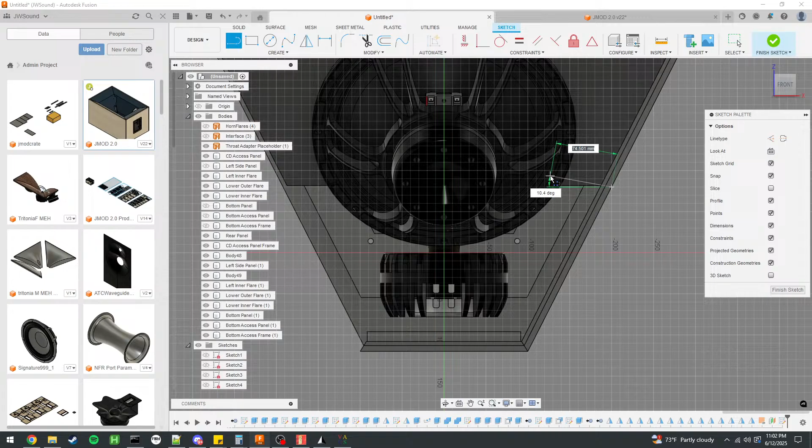But I almost wonder if there should maybe be some kind of arches here or some kind of frame. Yeah, kind of have an idea on that. Okay, so basically come in here about 125 or so. And then maybe kind of, actually, this is a very rough sketch just to see if this idea actually works. And that's not solid for some reason. Ah, there we go. Yeah, almost something like that.

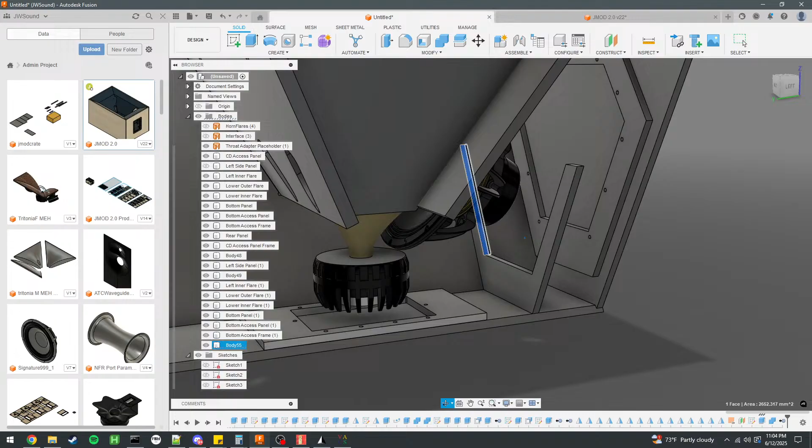So I'm gonna hide this panel again. Yeah, because that way there's not just this giant swath of a panel that doesn't have anything holding it in place. And I may even extend this up a bit. Yep. And then even bring it in a little bit too. 'Cause generally having a large panel that doesn't have any breaks or anything connected to it will start to resonate. So this way we're adding a little bit more ribbing, a little bit more support. And because these are kind of U-shaped, they should be able to get cut pretty efficiently. They won't use up a ton of space on the CNC.

But I think I'm gonna leave it there. I don't want to get too far into designing this tonight, just because there's a lot of work to be done solely in the AkAbak and simulation part. Main thing is I just wanted to figure out mechanically how it would all fit together and work. And I feel like the solution's pretty good.

I don't think there's anything that jumps out at me as being scary to assemble or put together. The access panels are super easy to cut. There's not any weird geometry with those. So yeah, feel pretty good about where this is headed. Very, very, very different design than any of the other ones I've come out with yet.